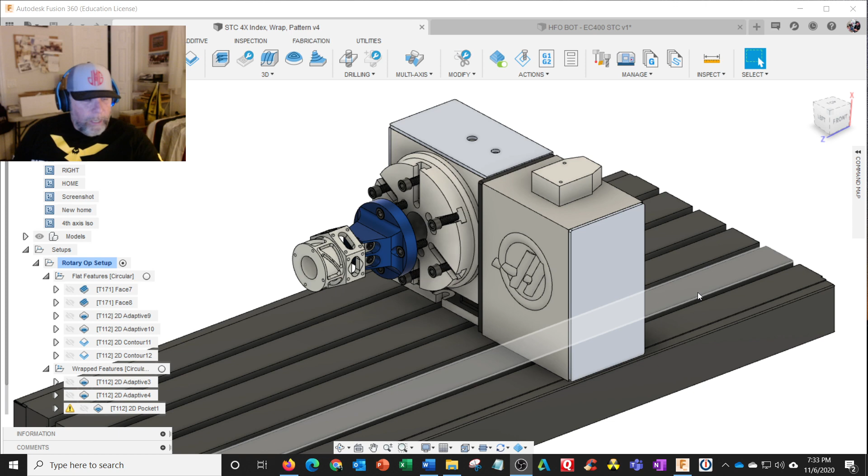Okay, if you go, I decided to put my view up in the upper corner. I've been hiding a lot of clicks on here, and I don't see it when I'm working away. I did not design or set this thing up.

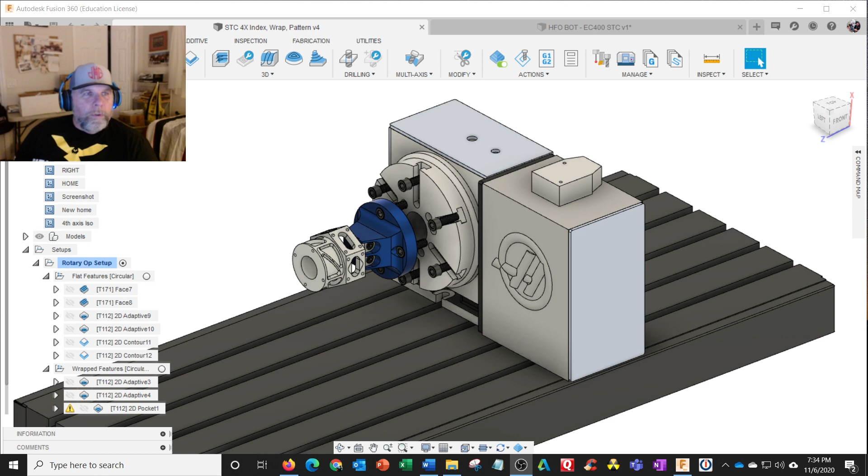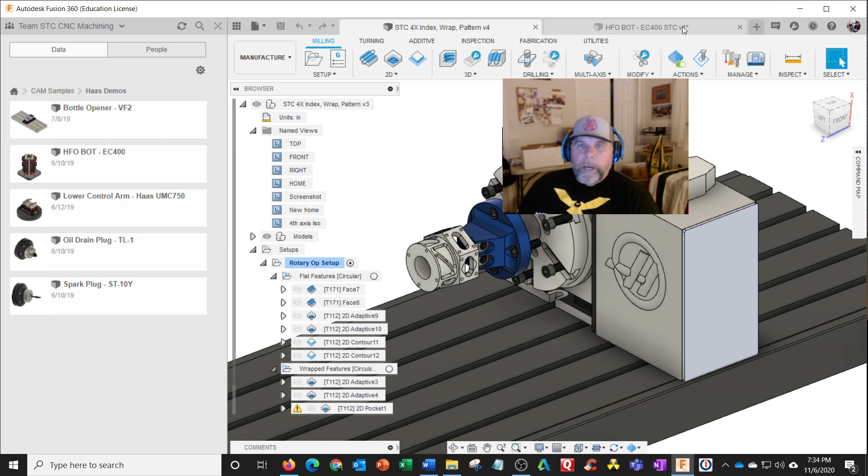If you go into Fusion and go into CAM samples, they're all in there. A lot of demos, Haas demos. There's a bottle opener there. It's got, oops, I'm in the way again, sorry. Fly over here. Okay, the bottle opener, there's a 4-axis part, which I have right here. Let me unzoom this.

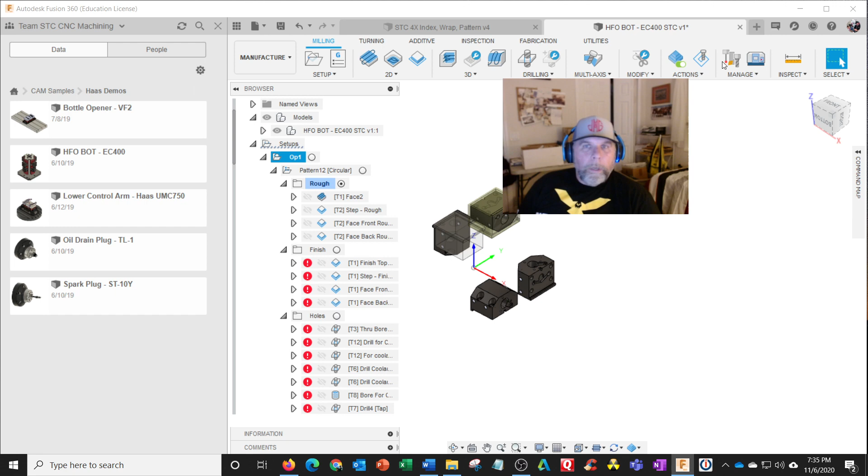Oh, I think I got some things shut off here. Models. Yes, I do. Oh, I got a lot of things shut off, I haven't opened this up in a while. But I think I was doing a lesson on the horizontal mill. So this one over here is right here.

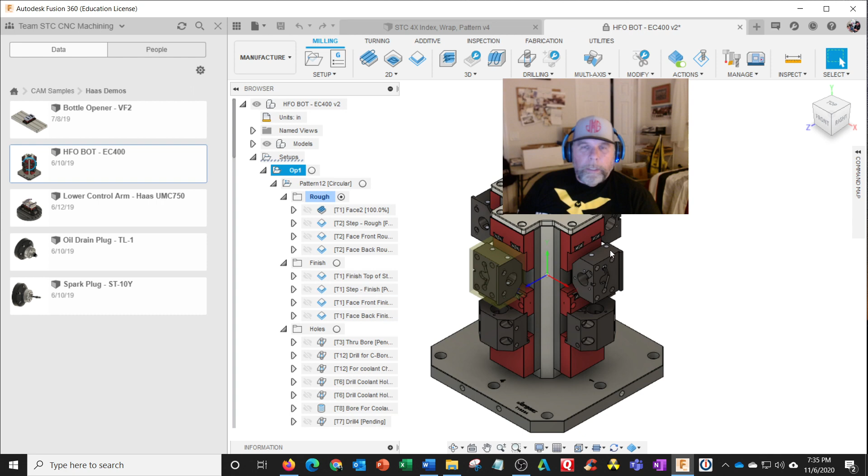This is a tombstone for a horizontal mill. And as soon as it comes up, I actually noticed that it made a part that I was very familiar with. These are the blocks that go on a Haas ST10, so these are vertical vises here. So they got it set up to do two operations, and I can see that when you're trying to design parts, you design them so in manufacturing they're able to machine this in two operations. And here's the material here. So the upper row looks like operation 1, and the bottom one looks like operation 2. It's got a Jergens plate on the bottom, tombstone.

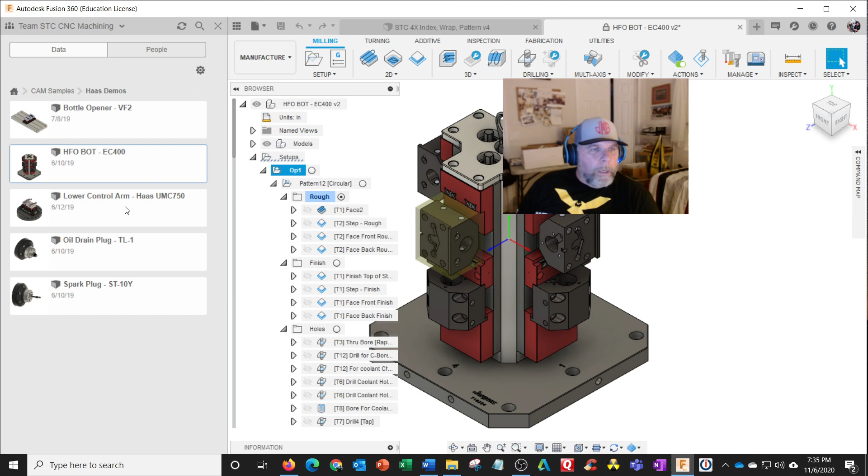Okay, so there's a bunch of stuff in here. CAM samples, work holding, 2D milling patterns, a chess pawn, 3D, 4-axis. I think there's some 5 here. Intro to 3+2 milling, mill turn.

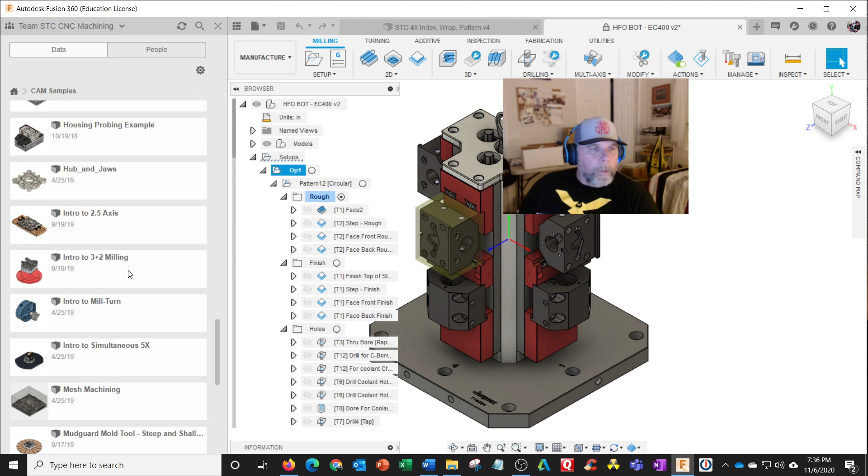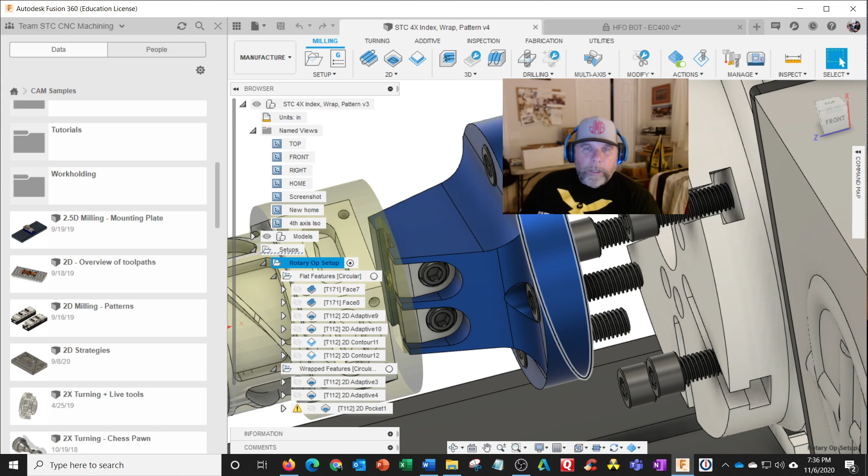So in this one, we have a Haas rotary on our VF2. We actually call it a 5C, it's very small. But right here, this is, and actually I learned how to do the Fusion 4-axis by just looking at this video. And I hid the spacer. We're trying to make, this is a Raptor mount, so you can upload the Raptor mount. You can actually upload the rotary table and this table, but you can get these all from Haas. With your Kurt vises, everything you can get from there.

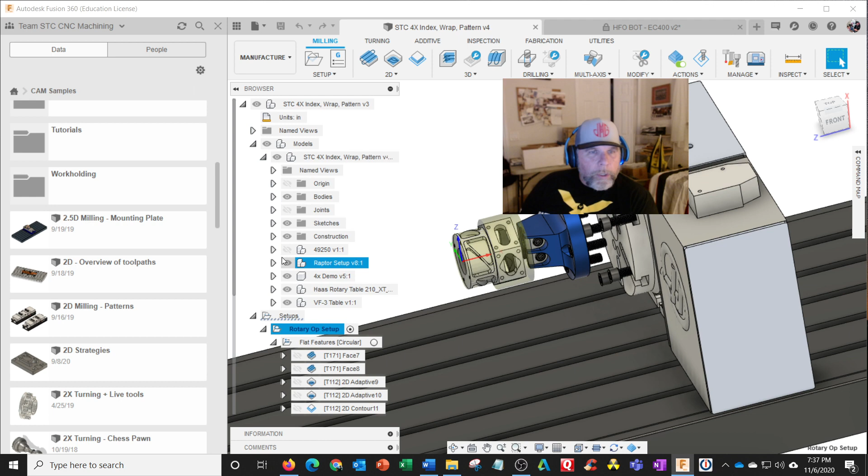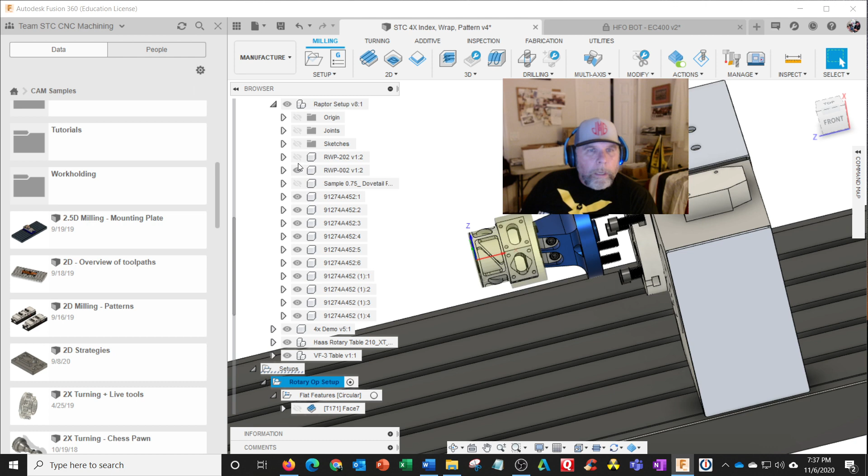So let me hide my named views, models, setups. I'm going to have a couple of these shut off here. That looks like, oh, this must be the vise for operation 2. So let's shut that off. Raptor setup, right there, not that one. Yeah, this is the spacer plate. I see right there, that's the Raptor part number.

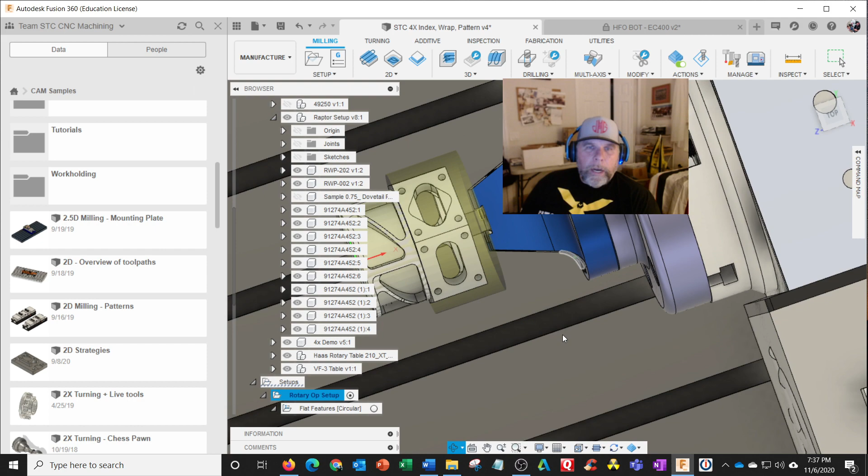So this is an adapter, I don't know if this is a 210 rotary, so it matches that bolt pattern. And this is an adapter for the adapter, right? And this is a nice mounting system, you have to pre-machine this dovetail. And if you look at the material, a round chunk of material with the little dovetail, that's how we're going to hold it. So I think 4-axis is a real nice way on the journey to multi-axis.

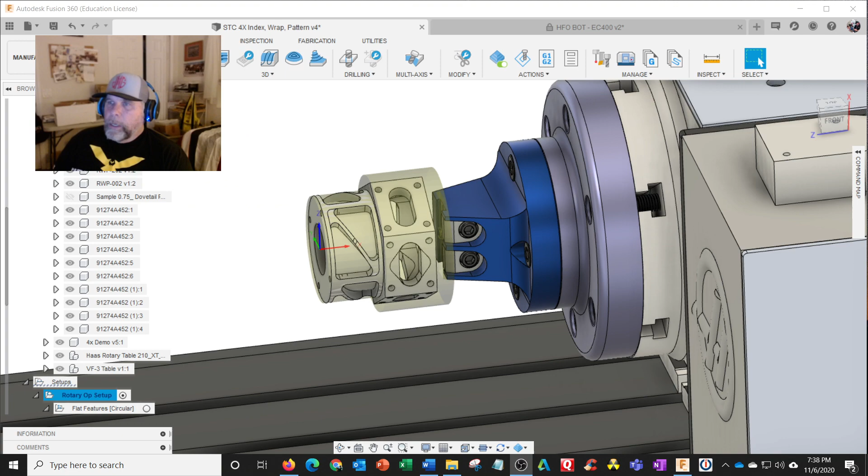So did I hide everything again? Okay, right there. Let me double click, resume this. So you've got a table, you can put the whole machine in if you want, but it says right there, Haas rotary table 210, right? What's this? What is demo and table? Table off, table on.

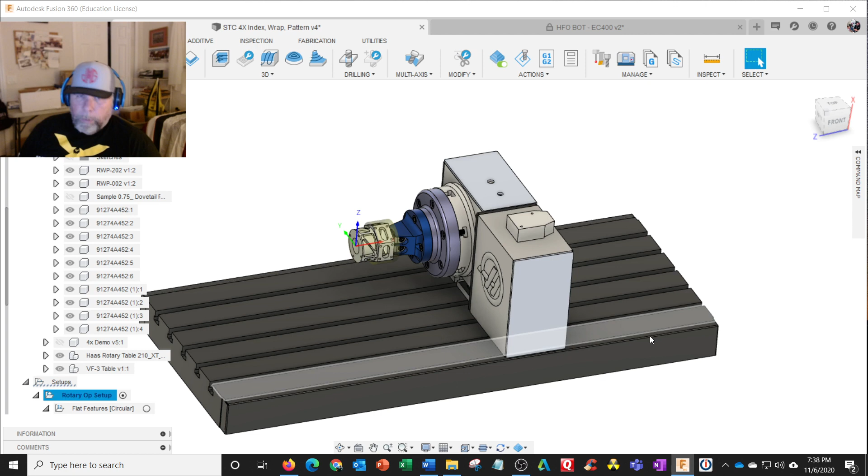So typically, I had to turn this around. Most people put the rotary table on the right side, and this faces left. This will be the A axis. Now when you get a B axis, like a double table, A goes around X, and it's either the other one's going to be B or C. You don't need 6 axis because the table can go in X and Y and go in circles, you don't really need a 6th. C technically is in line with Z, but all right.

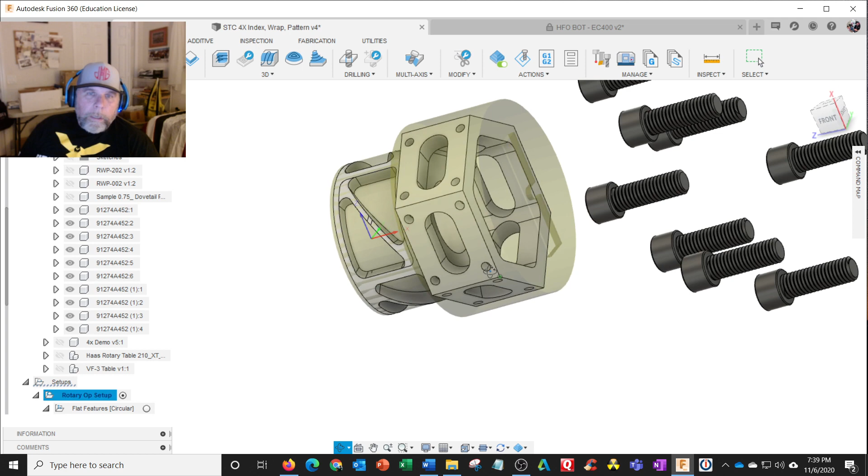So in this one, this is the part right here. Let's just shut off all the other stuff there, and all that. And see all the bolts, all right, got floating bolts. Anyway, looks like they have the. Let's see. Raptor setup, is the? Oh, that's the other side, sorry.

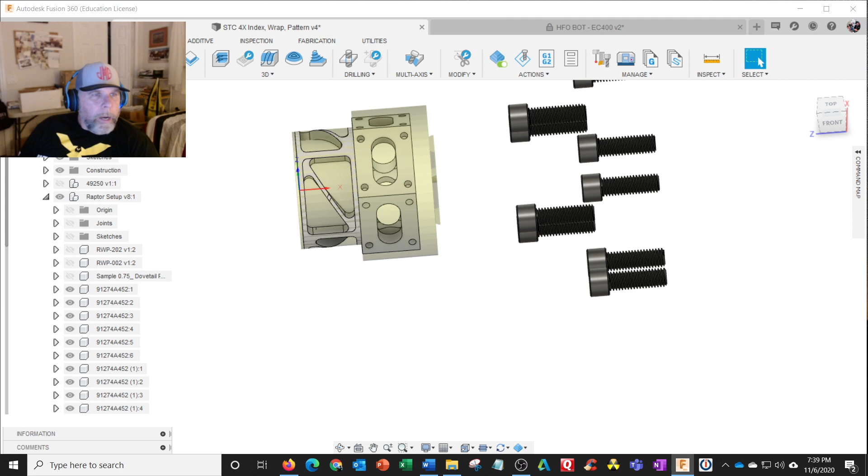Sketches, construction, planes, bodies, joints, origin, sketches.

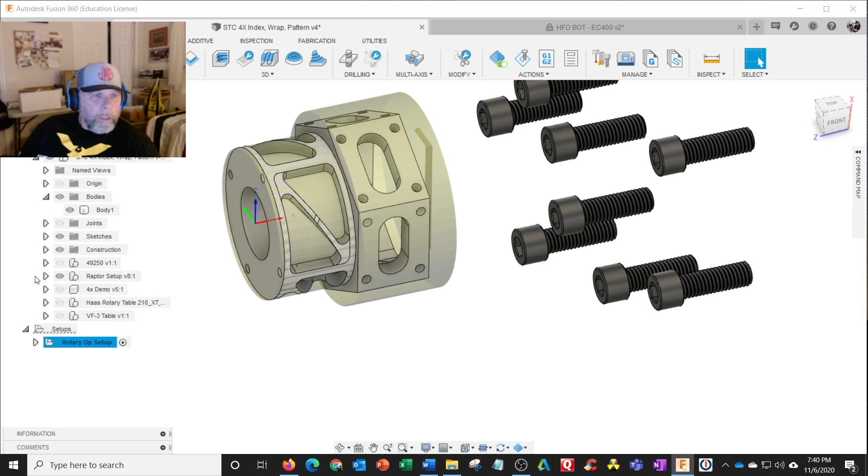Anyway, I'm trying to figure out. They must have drawn the material and made it translucent, that's what I've been doing lately, just to get a visual on it. So it's not really the material from the setup, or is it? So I go into here, edit the setup, right? I said, oh yeah, the material is from solid, so it's already designed.

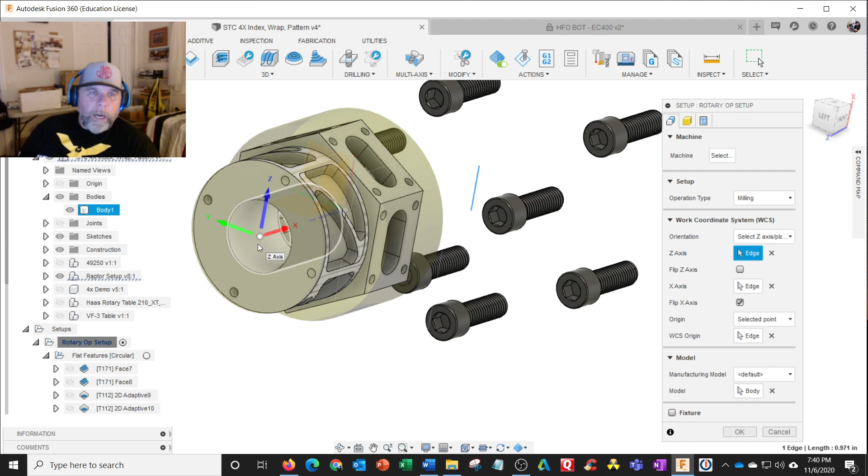So setup is, typically with 4-axis, you're going to put the Z and Y right in the middle, and X can be anywhere. Like if you were to set this up and made X the front of the material, or X is a little bit shifted to the right.

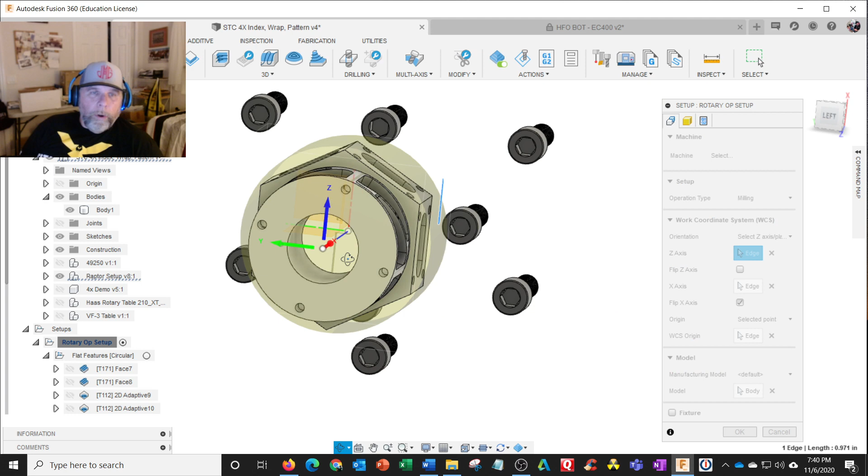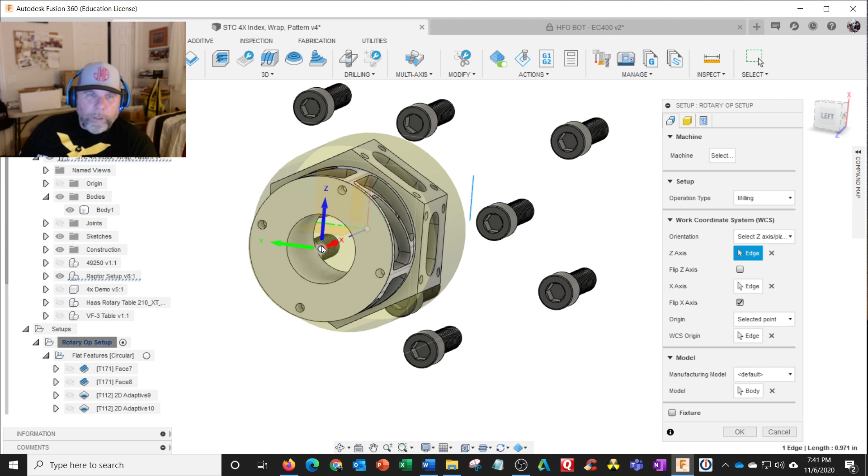So that'd be model alignment versus stock alignment. So in order to get this, I should just shut those bolts off. What I do is I do the web probe to probe both sides to find the middle. And then once I find the middle, I am right over the top, and I probe the top because that's the highest part of the hill. And then I just shift it down to the center, to whatever the diameter of the material is.

Some people use the table as a reference. Let me put the table back. Because when they build these, this center line is like a known distance. I've seen it done that way. Or they'll make a block here that's exactly the height of the center line. I've seen it done that way.

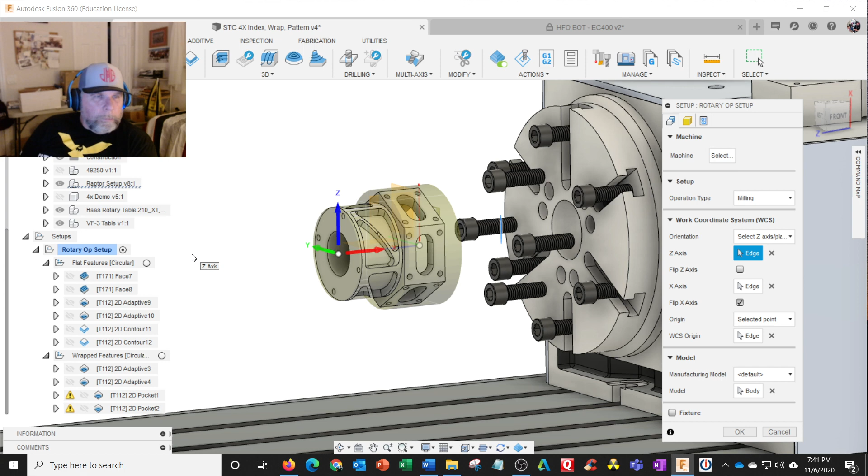All right, let me turn on the... So we're trying to make our own Raptor. We don't have as much money.

So we already made this part, and we're making something like this, but we're going to use Mitee-Bite clamps. We're trying to get away with not dovetailing. Let's see if it works.

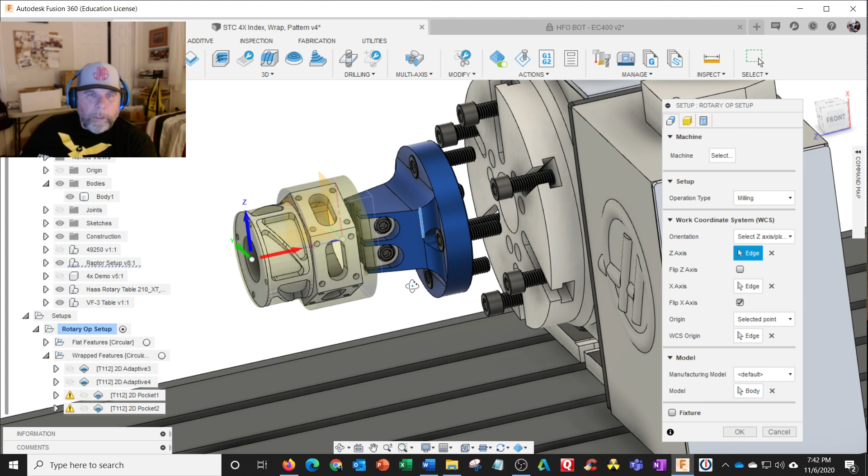All right, let's just simulate this thing. It's supposed to be done, right? All right, let me double click. Let me pull this out of the way. Shut off the setup. Oops.

So I made some more views because I kept flipping back to that view, and I wanted it to be in that view there. So I can save more views, just put a new updated view. Okay, let's hit...

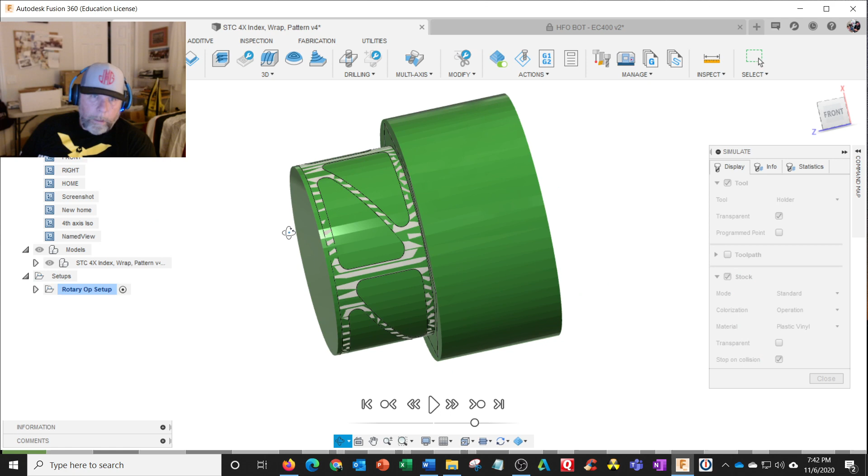Rotary op setup, okay, simulate. So if this was turned on the lathe, then we'd only need to mill features. We wouldn't... it'd probably be best. It would actually look better, and you're just going to mill the features.

All right, so we press play. For right now, I made my tool transparent. I leave the toolpaths off so you can see what's going on there, right? Oh, it's milling that flat area.

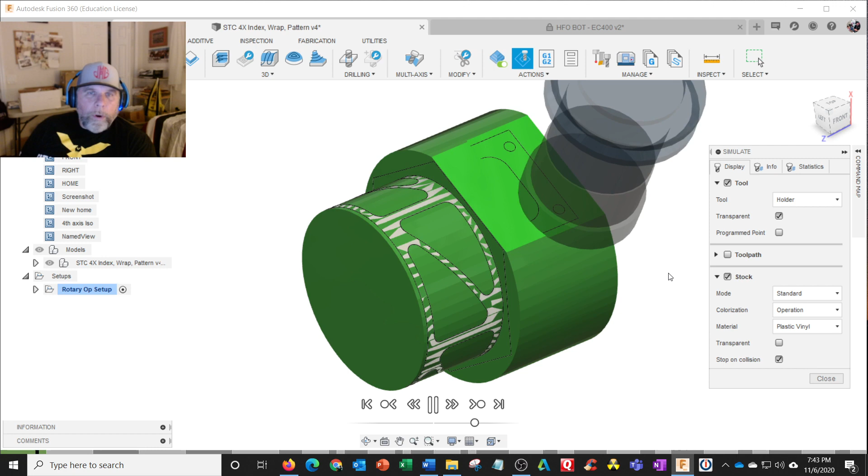Okay, and it rotates. Funny thing about simulation in CAD CAM is, in reality, the part is turning, but in CAD CAM it's the tool turning. So how it's simulated is not exactly the same.

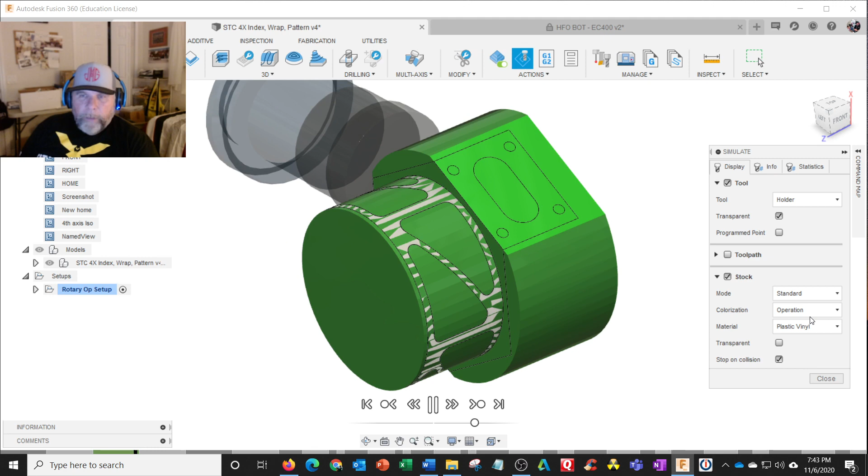And I have this set up to be colorization by operation, so that's another operation there. So something about that side must be slightly different. I think there's 3 green sides and 3 purple sides. So these are all, looks like face milling. It'll be indexing. All right, I'm going to pause this.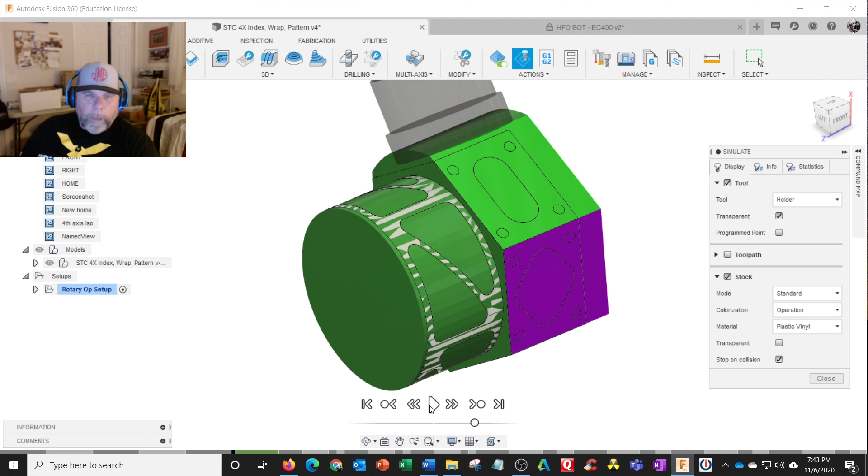If you hit this button, you can go operation at a time. Operation, operation. Okay, so what I liked about this was, oh, how did I get the rotational stuff, right? So I turn this on.

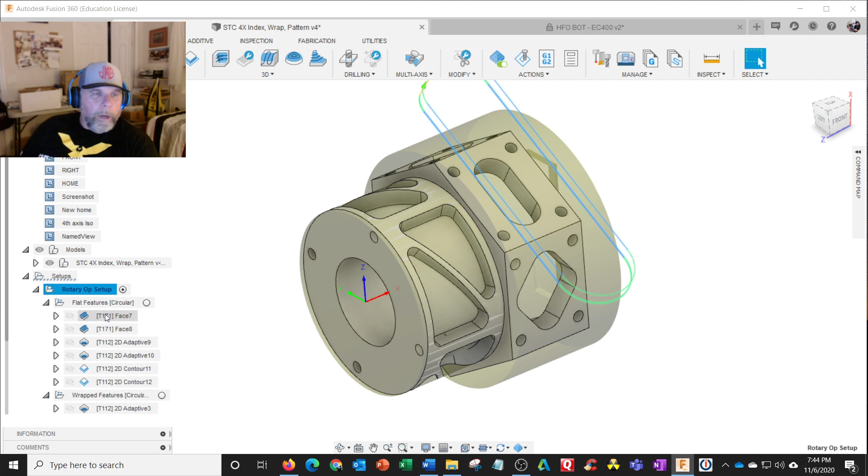Tool 171, well I'll have to edit that. So all right, I went in here and I'm looking at this, I'm going, all right, this is pretty typical, 7,000 RPM, geometry. Oh, tool orientation is now checked. That's never checked on the other ones.

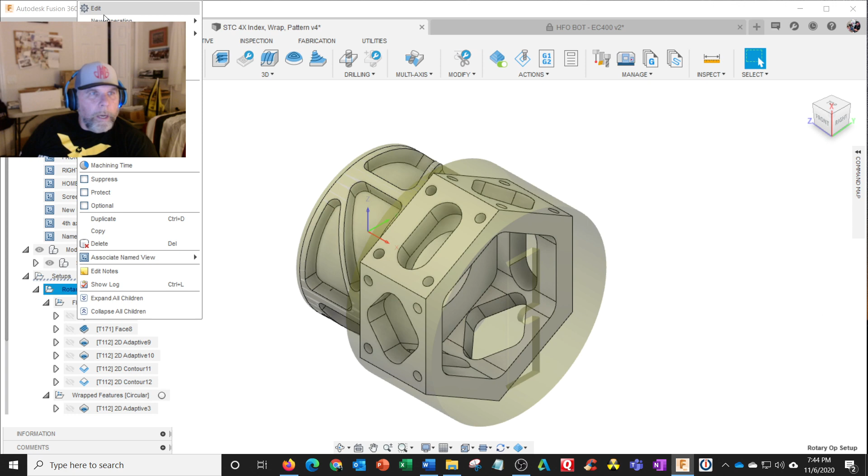Is there anything different on the initial setup, right? No, that's the new setup, edit. So this is all the same. This is all the same. And this is the same. Okay, nothing special there.

Nope. It says fixture. You can actually turn on the fixture and you can make it so I can identify it for collision detection. All right.

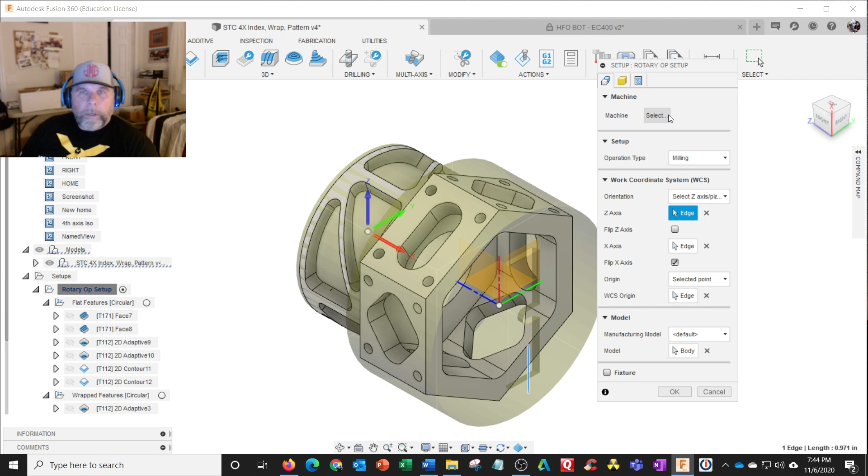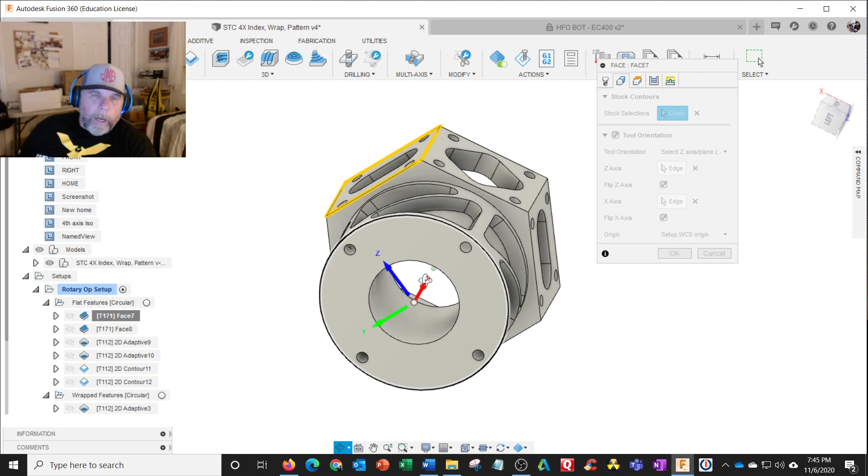Back to here, edit. This is pretty standard. This isn't—so right here is tool orientation. So what you need to do is align your Z and X the way it would be when you go to machine that way. So looks like in this case they just rotated it around the X.

How do we do that? It looks like you select some of these. So it says select axis and plane, and from origin—so what are your selectors here? Model, select, okay. And retract type, so, got stock top, model top, feed height disabled.

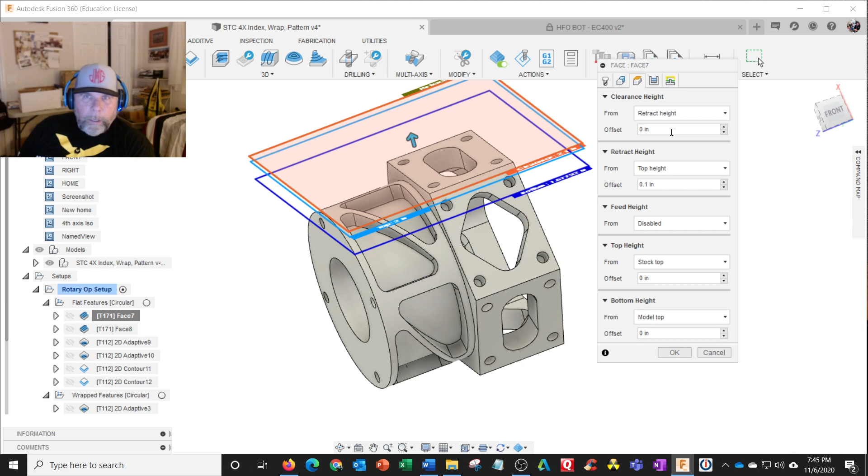Top height, retract height, okay. And all this is pretty standard stuff. Okay, I don't see anything. And there's the toolpath right there. Toolpath for one operation, so I don't see them all.

How come we don't have them all? Because down here it says circular. What's that mean? Oh, look at that.

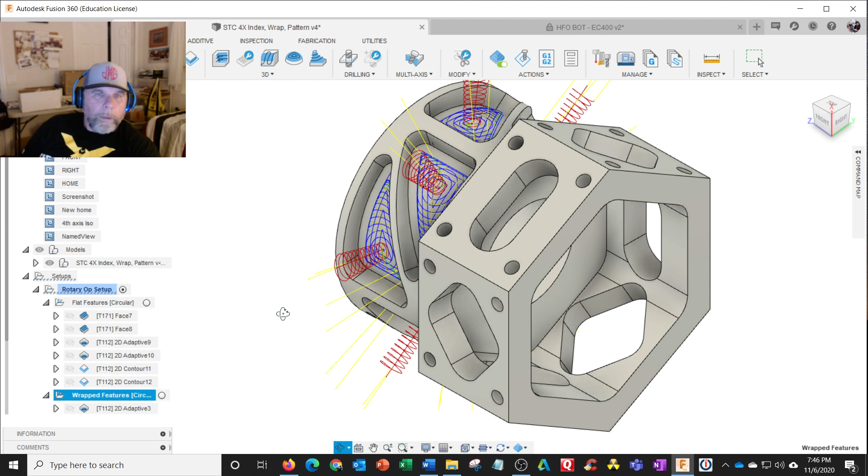More stuff. Let me go this one. Okay, let me shut that one off. Turn this one on. Okay, we got that feature. That's the bottom. What's this one? Adaptive. So that's different.

So how does it rotate, right? Oh, here, right here it says wrap pattern. So pattern, you can get it to do repetitive stuff, like in a flat plane, or in this case, in a rotary.

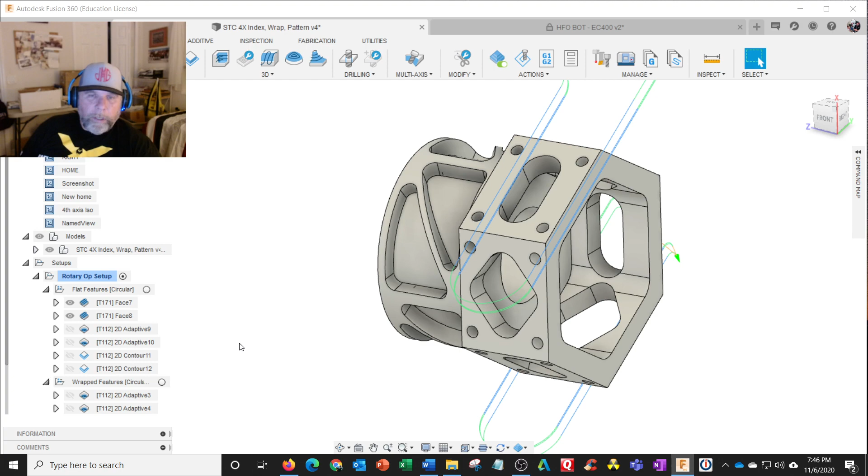So you can program each one individually, but if there's nothing that changes other than position. These two operations are different from each other, so you would need to rotate this one 120 degrees twice.

All right, how does it do that in here? Wrapped features. I see 2D adaptive. So these are roughing. This is face mill. This is adaptive and contour. So this is like twosies. And that's all there is.

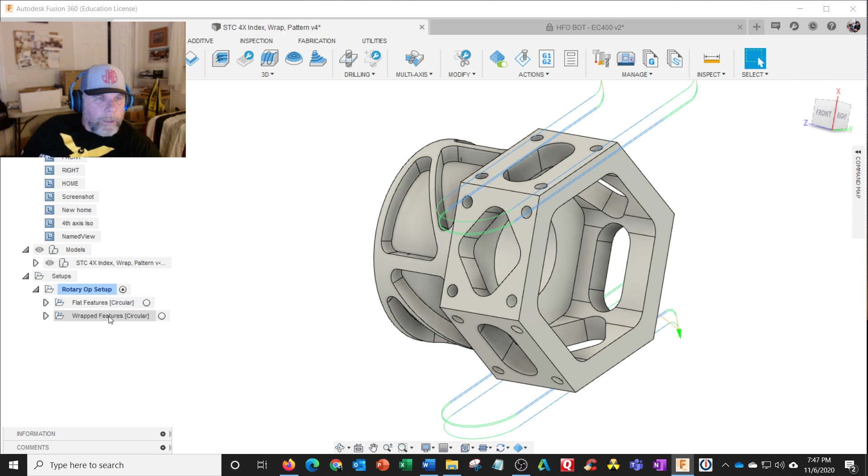So up here in setups, flat features, wrapped features. The wrapped is actually doing the curve. These are what we call 3+1 milling. You're indexing, just turning and indexing. These are full 4-axis because it has to turn the A while it's doing that.

So the feed rate actually becomes different because a rotary axis is not linear, it's not a line. It's I think it's called inverse time feed. It's a little slightly different. And there are some settings on a Haas where they'll ask you the diameter of your object because it has to do another calculation to convert round into linear.

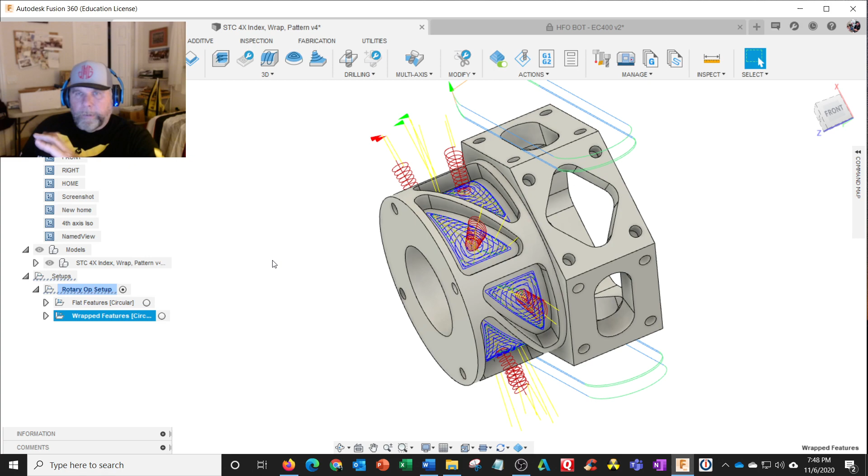But I can see right here, these are ramping moves in, like a cone, and these are the machining paths right there. Looks like adaptive machining paths.

So let's break this down a little bit more. So I got face, and this says wrap pattern. So let's see. Trying to learn this backwards. This is all under models. So wrapped features, wrap pattern.

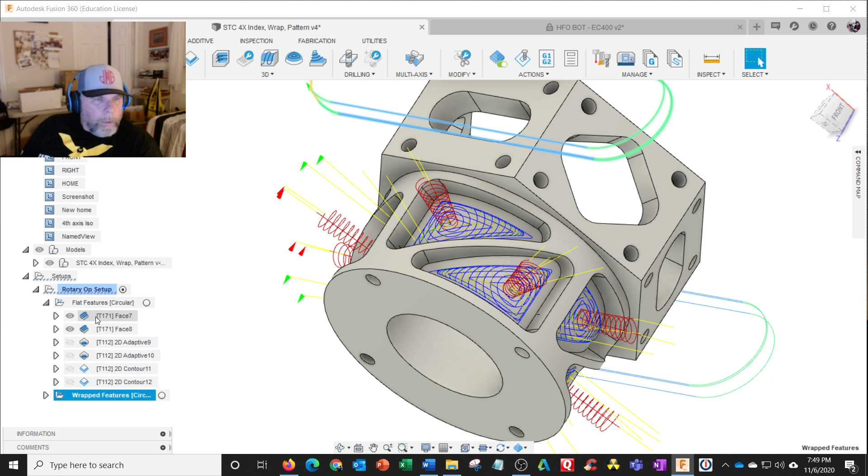So I'm trying to figure out here. I thought there was a, let's see. Let's go into here again. Edit. All right, so we got geometry, tool selections, and so it identifies the stock. Yeah. Yep. Tool heights, multiple depths. Okay. So trying to figure out.

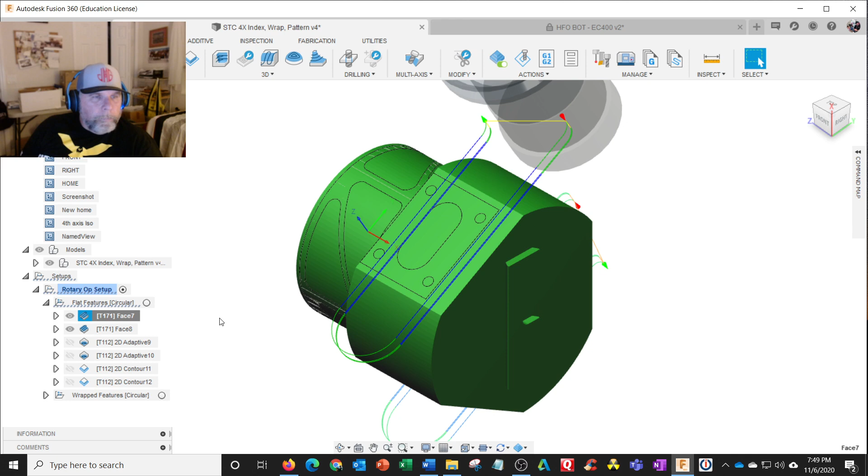Let's just let this run. We'll do some thinking here. Simulate. All right, press play. There's a little dovetail there. All right, so it mills to flat.

All right, let's finish doing that. That's a finish of like. So then they flip to this one, right? That one's different, that one we know. It goes back to that with a different orientation.

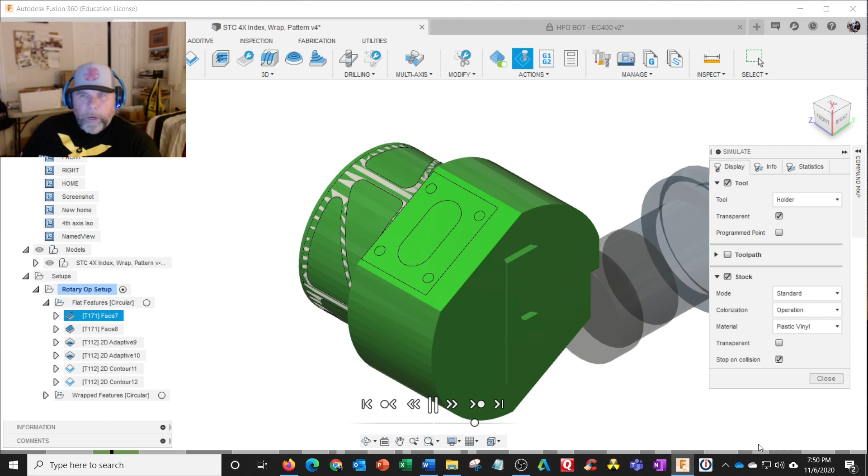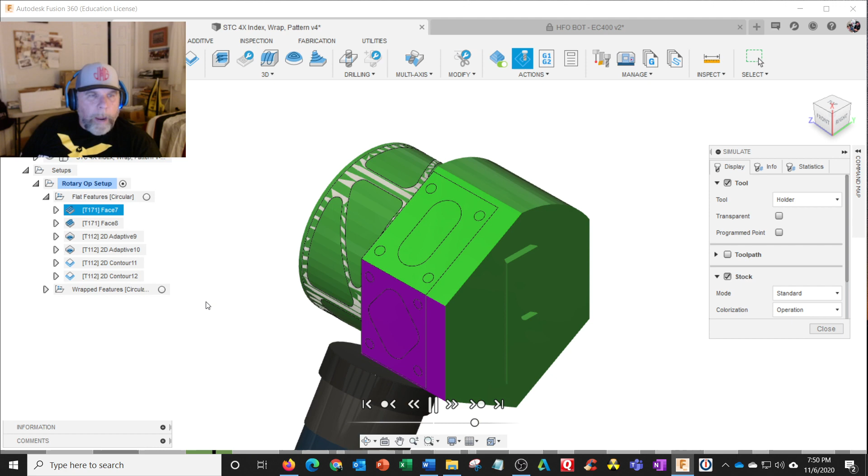Let me make this solid. Ooh. There we go. Last time I did this, I thought it was very obvious how the wrapped worked, how the pattern, I think it's pattern.

All right, let's bail out of this. Close. So up here, you got setup and new pattern. Duplicates a single toolpath instance that can be used for multiple instances in the same part. Pattern.

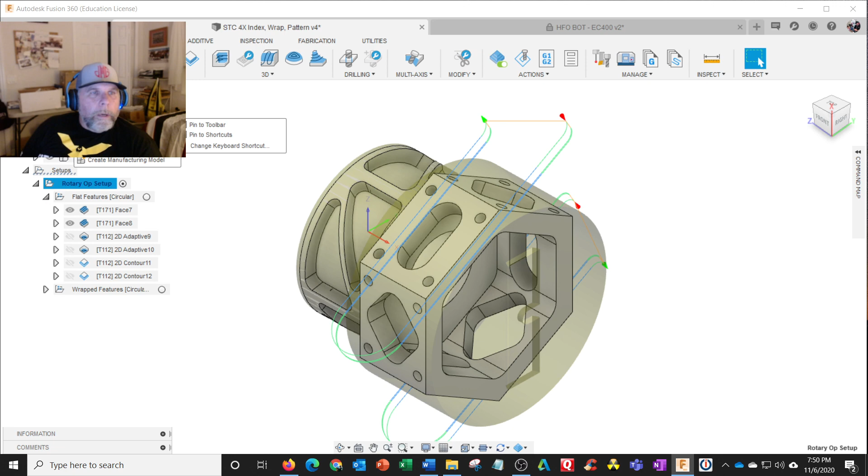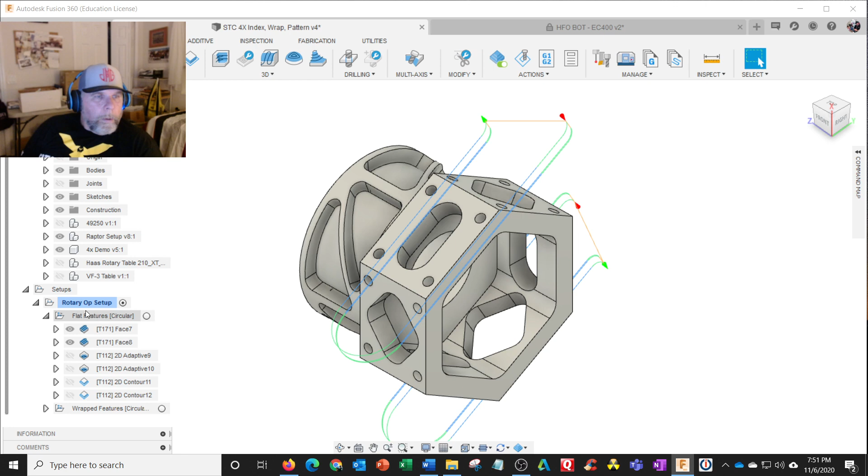Origin, that's pretty straightforward. Bodies, sketches, construction. No, that's that other vice. Oh, I am baffled.

Is everything? Oh, wait a minute. It says flat features circular. Let me edit this one. Pattern. Here it is, right here. All right, so you set up the pattern to begin with. So everything under this is going to be following the patterning.

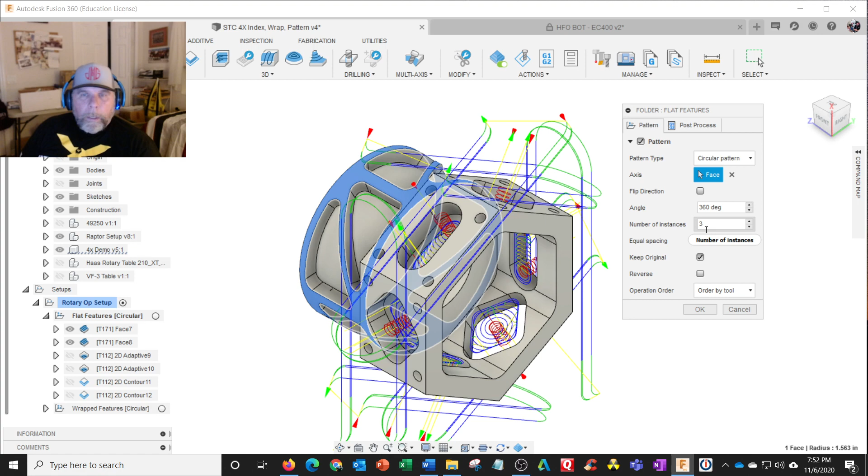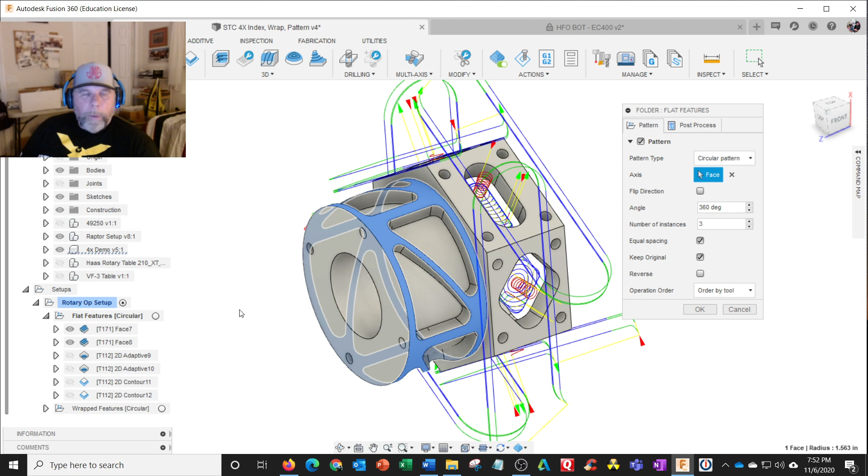Post-process override work coordinate. Okay. Axis is the face. Okay. Angle 360. Number of instances 3. Keep original equal spacing. Order by tool, meaning that don't go 1, 2, 3 - keep on changing tools. Just keep the tool out and do as much as you can, because yeah, that would definitely save time.

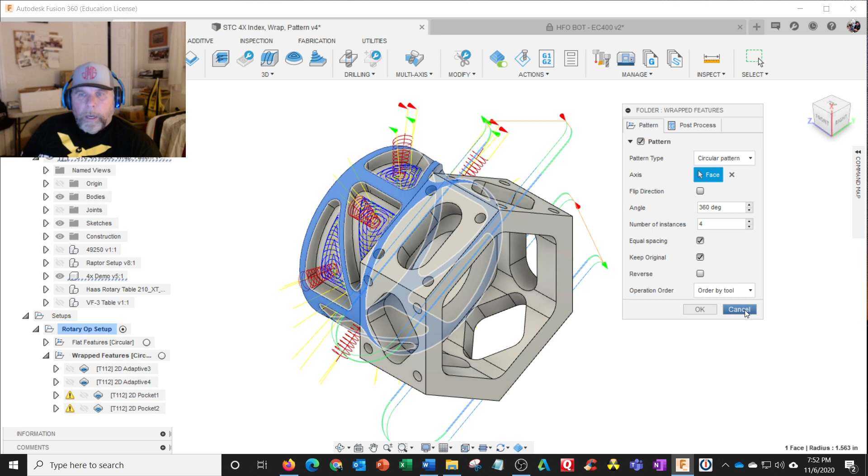Okay, so this is where the patterning comes in. So up here is the same thing. Hit cancel and edit. Same thing, pattern. The pattern leads you to the other operations. So you gotta put, well, I think you can do one operation and then sneak a pattern in before that.

So anyway, personally, I'm going to play around with this a little bit because we're going to finish. We actually, our 4-axis, I'm sorry, 5C rotary - we have collets, we have some bigger collets, and we have a 3-jaw chuck. That's a screw-on chuck, so we can do something like this and just hold it with the chuck and see if it holds well. I mean, the Raptor dovetail is a very good system. Or we had something like those 5-axis self-centering vices, but we don't have the money for that. So we just try to learn this stuff.

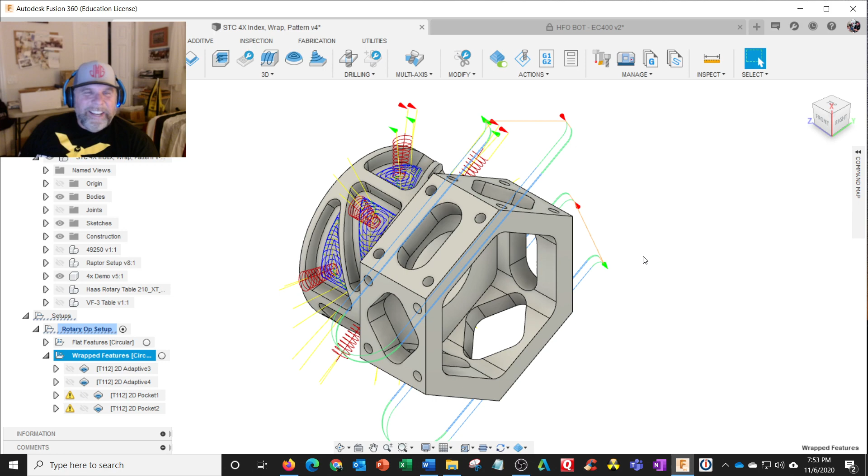We actually had made a titanium golf club putter head, and that took about 4 or 5 operations. And then we realized, wow, if we had put it in this orientation, we could have done like 3 of the operations in one fell swoop, and then held it in the soft jaws and just cut the back off. So trying to think out of the box here.

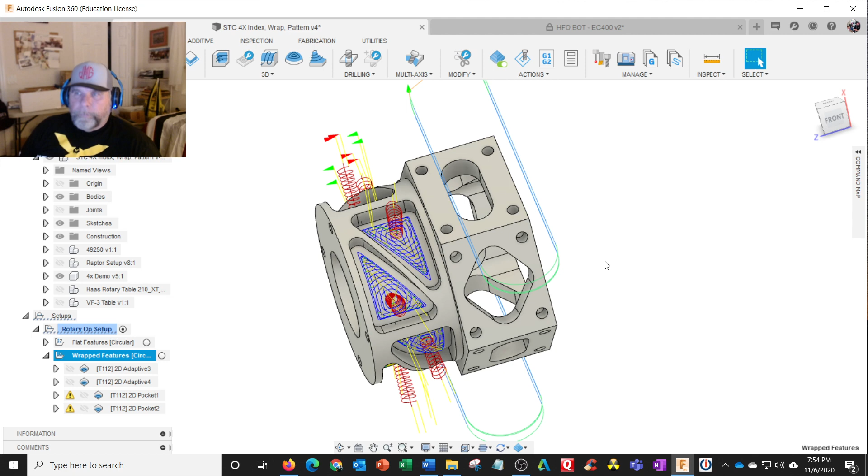Anyway, 4-axis, I love multi-axis. Talk to you later.